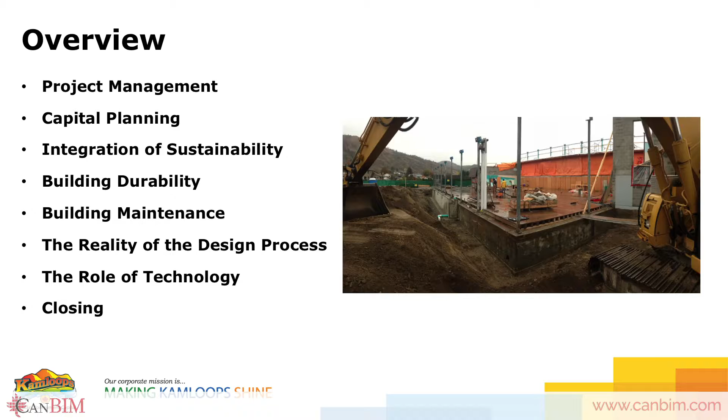So anyway, that's a little bit about me. Give you guys a quick overview of what I'm going to talk about. My focus is more about, instead of technical design stuff, the implementation of these things and how it all comes together and how we look at it and move through these projects. The first note is project management, which is kind of my role at the city, then I'll roll into capital planning and sustainability, which I'm sure you guys hear a lot about, which is great, but what I want to express is how we actually get it done—it's a little more difficult than it sounds getting it rolled into the project.

So anyway, I'll touch on that. I'll talk about building durability as well, building maintenance, and then the reality of the design process, I'm calling it, and then the role of technology.

But you got to recognize the importance of everybody's role, and I make mention of that by saying even the guy that's providing the steel can take the project off the rails as just a supplier. So you've got to regularly be aware of that and make sure you have the people in place to make sure all these things are getting done and you're not getting yourself in trouble.

So keeping in mind, having a coach mentality is kind of how I do it. Instead of just pushing things off, I try to work with the team and monitor the health of the team, and hopefully the architect and the general contractor are open with issues and we can work through them as a team, because that's what we want to do at the end of the day. Everybody has the same goal in mind. You just got to keep that in perspective for everyone.

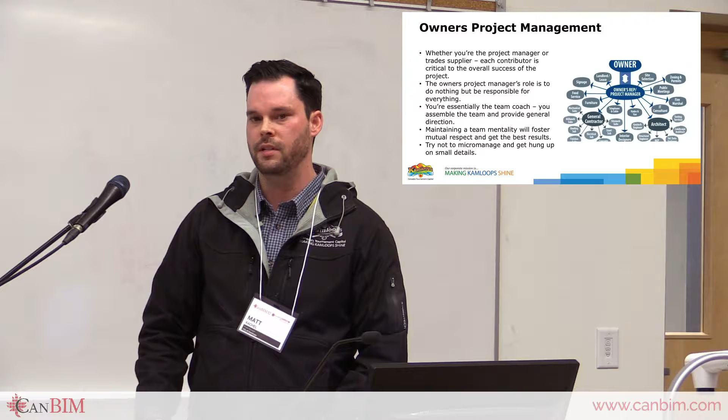Having that team mentality fosters trust and mutual respect, and then you're more open with each other, and it's easier to work through problems as they come about.

Okay, capital planning. So this is the tricky part. A need or a want is identified. The artistic people have ideas, and the technical people build boundaries around them. What I mean by that is usually these great ideas come about, and then an engineer comes and says, oh, you can't do that because of these reasons, you can't do this, you can't do that, and we have to pull it back until we get it in alignment with something that works. Not every design works for every site. You can't put sustainability in every single project. You have to just be conscious of that.

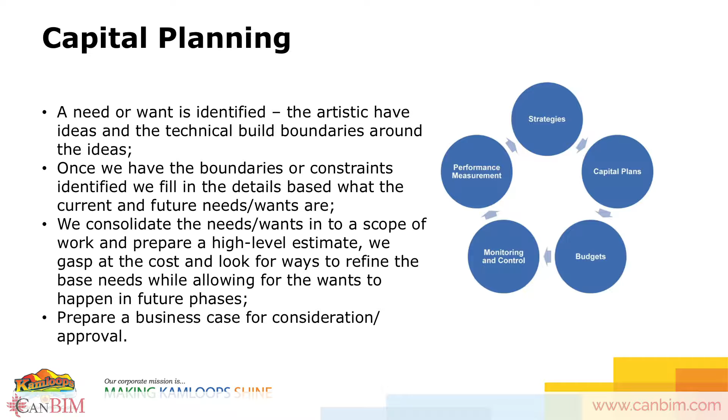So once we have the boundaries or constraints identified, we cycle through what the needs and wants are. The needs are kind of what's going to define the business case - let's use pools for example, because that's what I'm going to lead into. So we have all these tournaments coming, the population of Kamloops is growing, we need another pool. So those are the sort of things that would be a need - we need a pool.

Moving on from there, now the wants start to roll in. Well, it would be nice to have a slide, and it would be nice to have maybe a spray park outside of the pool or something like that. So these are the wants that start to roll in. And then once we have all those on the table, we look at the costs and we gasp, and then we start to figure out how we're going to get that done.

It's important to have all those wants on the table, because we can work towards that in future projects. We may not be able to get it all done right away, but at least if we think about it and plan for it, then it can happen later. So once that's all done, we put together a business case that goes forward to City Council for consideration. I've really tried to cram a lot in here, but there's a lot of complexity and thought that goes into these before they go to council. I know sometimes people from the area, some ideas might seem like they just came out of nowhere, but really there's sometimes years behind thinking about these things and planning them.

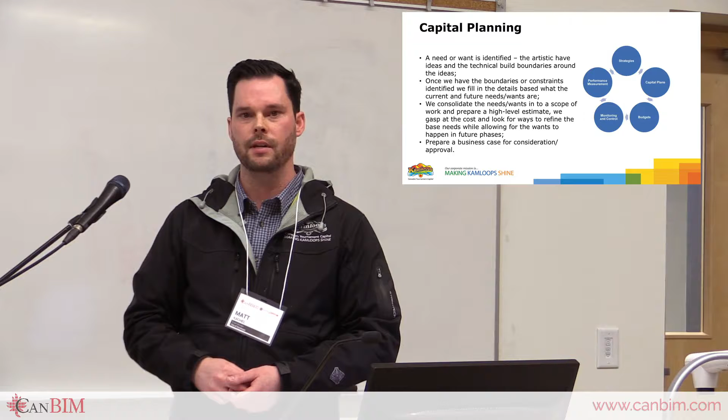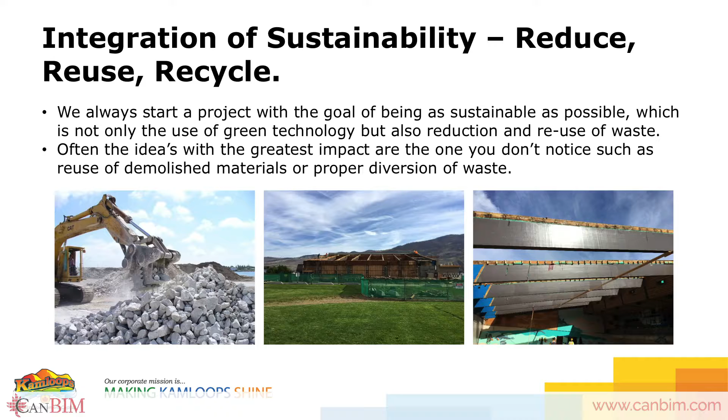Okay, integration of sustainability: reduce, reuse, recycle. I just wanted to shed light on this. We like to think of these sustainability projects about the things we can see and touch and feel - okay, let's do solar panels, let's do this or let's do that. But sometimes you have the biggest impact in a place you don't expect and you can't see.

So I have a few examples here of projects. The first one with the excavator with the crusher there is not actually from a project - that was just an example of concrete crushing, which I'll lead into. The other two photos are of our Westsyde Pool. Some of you may be familiar with this project, we did it over the last few years. For Westsyde Pool, we preserved the pool and basically rebuilt the frame and structure. This created a lot of waste because all the wood material that came off the building - what are we going to do with it? I think that's something that gets kind of lost in the sustainability piece sometimes.

This is a massive amount of wood to get rid of. What do you do with it? You need to look at the demolition and go through these pieces and see where there's value. Those beams maybe aren't good to support a roof anymore, but they can be used for other things, so let's just not throw them away.

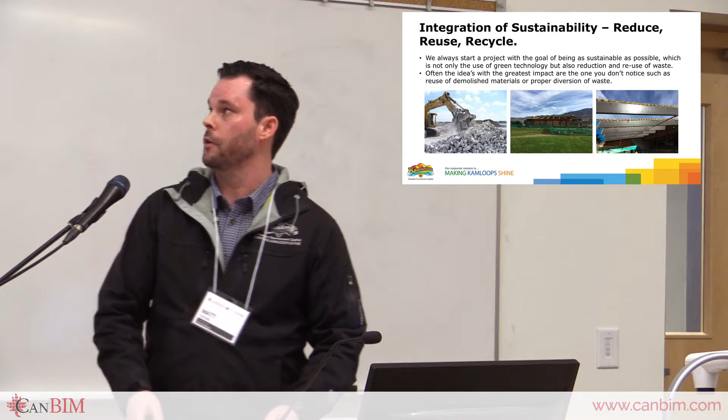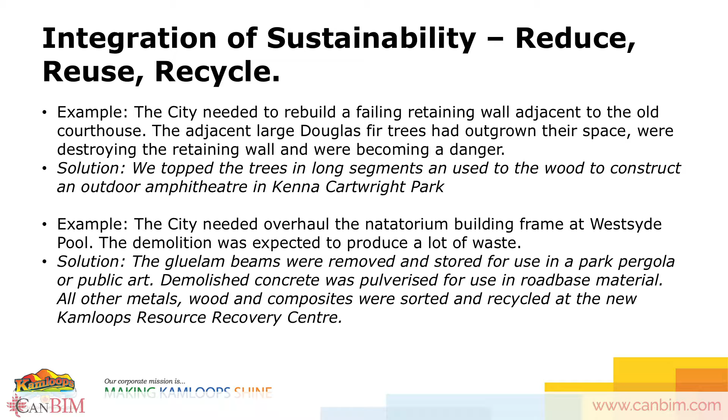I'll lead into a few examples here, starting with concrete crushing and reusing materials. The city rebuilt the retaining wall on the side of the old courthouse a couple years ago. The wall was getting pushed over by massive trees, so we had to remove them. Anytime you remove a tree there's a big issue, but there was a lot of thought put into it.

What do we do with these big, healthy, mature trees? We don't just want to cut them down and send them through the chipper. So we topped the trees into the longest segments the faller could handle, loaded them on a truck, and they were used to build the amphitheater up at Kenna Cartwright Park. They weren't just thrown away.

The other thing we did is take the old concrete, bust it up, and use it on our roads. We make what we call RAP, reclaimed asphalt and concrete material. When we do a road project, we'll mill the road, collect those millings, and use them as road base for other projects because there's still value there. We'll use the grinded concrete and mix it in to reuse it instead of wasting it.

Not all sustainability concepts are good for every project. They need to be clever, have a clear and measurable benefit, and be financially viable. It's easy to get sucked into the really fun stuff like solar panels, but you want to be conscious of what your payoff is.

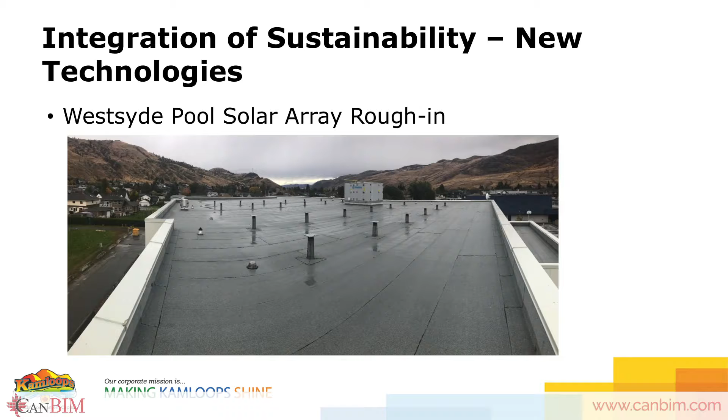This is the roof of Westsyde Pool. You guys saw the deconstructed building—this is the new flat roof and frame, and those steel pieces projecting from the roof are supports for the solar array. We had the building apart and thought, well, we can't buy all the solar panels now, but we can make space for the inverters, integrate the mounts to the structure, and run the conduit to feed the cable through to get them connected.

This actually went forward as a supplemental. If council accepts it, we can essentially mount the PVs, run the cable, and hook it up to the electrical system—it's all been considered as part of the original construction. It's a way of trying to say, okay, we can't be totally sustainable yet, but if we include these things now, it makes it easier for us later, because you can't go put this on after the fact.

The reason those supports have to be so significant is that wind uplift and snow drift can cause a lot of grief to the structure. It's not a matter of just easily bolting down a jack in this situation—there's a lot of wind load through here, so they have to be properly anchored, or the solar panels will go flying away.

We also have to get creative because people like to steal them, so we put tamper-resistant hardware on there to try to slow people down. I think the Sing Bowl a few years ago had solar panels on it, and those were taken—$100,000 worth of solar equipment. Whoever did it knew what they were doing, because they got the inverters, the cable, the panels, everything, and they didn't break any locks.

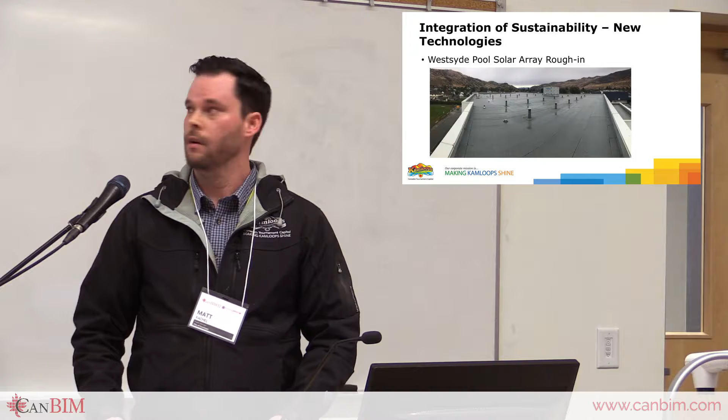So just things to consider when you're doing these projects—solar equipment has a lot of value to it, and people will take it.

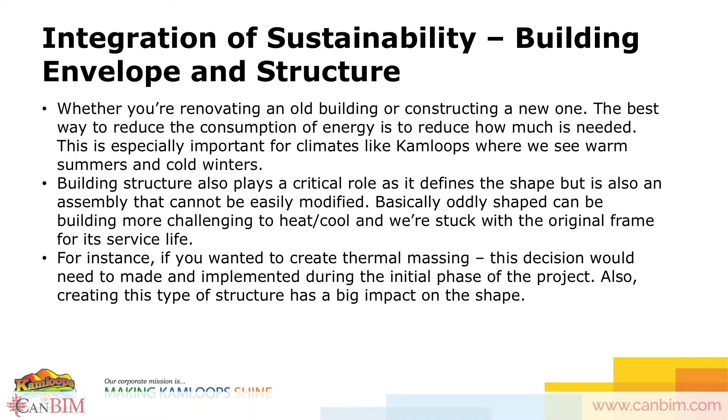Whether you're renovating an old building or constructing a new one, the best way to reduce energy consumption is to reduce how much is needed. This is especially important for climates like Kamloops, where you see extremes—either really warm or really cold. So when you do the envelope and structure, you've got to be careful and think about the climate to get maximum benefit.

Building structure also plays a critical role. If you make the building a really weird shape, it's going to be harder to heat and cool and get air to all the spaces you need. So if you want to do major sustainability things, it's good to think about it at the start, because this will also affect the shape.

I'll use an example of thermal massing, which some of you may be familiar with. It's basically, to put it simply, a big section of concrete that absorbs heat all day and then radiates it back out into the building. That obviously has a lot of effect on structure, so if you want to do that, you need to think about it and roll it into your original plan.

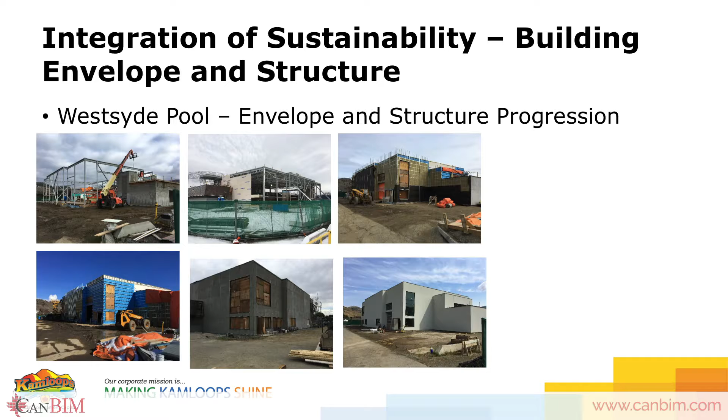Here's an example of the progression of Westsyde Pool to show you guys. You can see the frame, the insulation and stucco layers starting to go on the blue skin, and then the finished stucco product. So there's a lot of different layers there.

On top of the climate of Kamloops, you also have to think about the use of the building. With a pool, you're maintaining this constant balmy environment, so you have to be really careful about where the condensation points are and control the water. Ideally, you want it to leak to the inside of the building—if you can see the wall sweating, you've done your job. The problem is when it gets stuck in the wall and you get rot. I'll show you an example of that coming up.

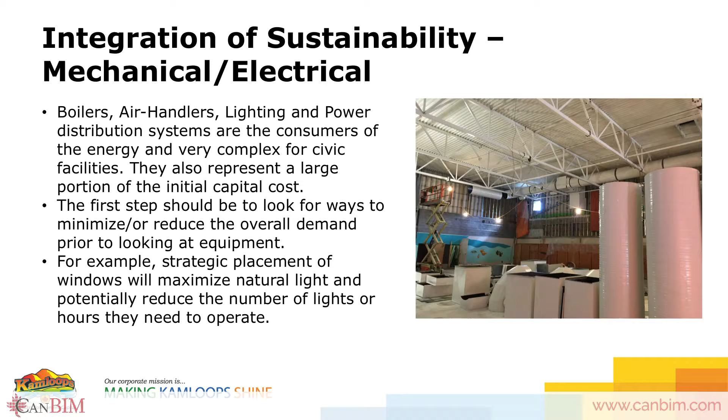The other thing—and I think this is where everybody gets stuck—is the mechanical system. Yeah, you can put in new boilers, air handlers, special lights and stuff like that, but if you take the right mindset from the start and try to reduce the number of parts you need, that sometimes provides a greater benefit. For example, strategically placing windows so maybe you don't need a light all of a sudden. Thinking about that as you go through is critical.

One example for Westsyde Pool: one of the top pieces of advice we got from the mechanical designer was to put a cover on the pool at night. Seems very simple—we don't have a cover. When the pool's sitting there not used, all that heat's just leaching off the pool and getting up into the superstructure. If we could cap it off, the boilers wouldn't have to work as hard to maintain a temperature nobody needs at 2 in the morning. Just a simple little thing, not the really exciting part—just adding a pool cover—but little things like that can make a very big difference.

Whereas if we're investing in a boiler—I know what they cost for Westsyde Pool, they were $120,000. That pool cover was $15,000. So it's a lot cheaper, and you get comparable benefits from it.

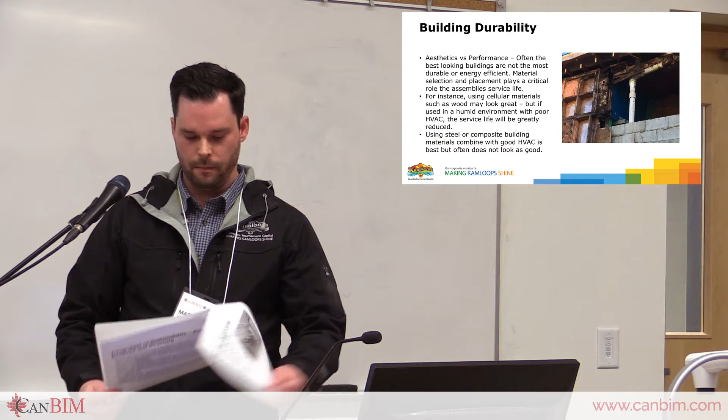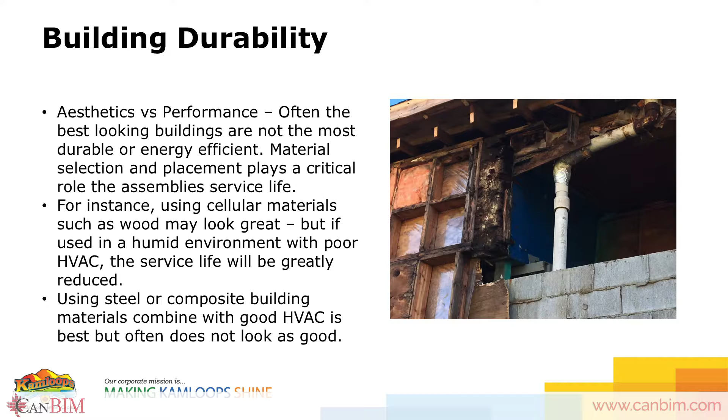Okay, building durability. This is one of the main glulams on the end of Westsyde Pool. For those who don't know what happened here, there was a building envelope failure over years and years of condensation. This is an example of what I was talking about—not controlling the dew point.

When moisture ends up where you don't want it, especially on cellular materials like wood, you end up with rot, and a lot of times it's hard to find because it's concealed. In the example of Westsyde Pool, this was not apparent for a long period of time because it was concealed in the walls. The structure that could be seen was fine—there were multiple inspections done, and there was no reason for concern.

And then a few things came up that led us to believe there was another issue. The problem here was actually an air leak, not a water leak. People were thinking when you see a leak in the pool, you automatically think it's an exterior leak, but it was an internal leak, an air leak that created a lot of condensation, and that's how we ended up with that.

But the beams were, at the ends especially, quite damaged because that's where the air got concentrated. Building shape also played a role in that. It had a slanted roof, so everything got trapped in one corner. If you look at the rate of the damage around the building, you can see how the shape played a role in the damage to the envelope.

So when we're taking these things forward at the city, we try to make sure that the materials we're picking work with the use of the building. So we have a pool, for instance. We shouldn't be building with wood. We should be using steel or composite materials. I'm not saying you can't use wood, but...

I'm just curious, have you guys looked into smart sensors or anything for these, to monitor it? For this example it was obviously too far gone already, but putting it into the new building makes sense to monitor moisture points, so if we're getting a lot of water condensation, what's going on, you can kind of target your repair a little bit. We haven't actually done it here yet, I did it when I was a consultant, but we haven't brought it forward to buildings yet. It's a good idea though, for sure.

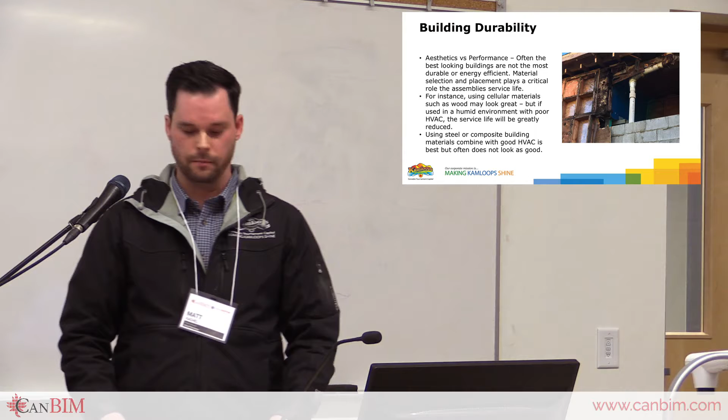Oops. Am I missing a slide? No, okay, then we're good.

Okay, so this is where I'm going to tie it into the BIM stuff. So the reality of the design process: owners like to change their minds. I can tell you that as a representative right now - it's not necessarily me doing it as the owner's project manager, but the people I'm working with will, and they don't understand all these drawings all that well.

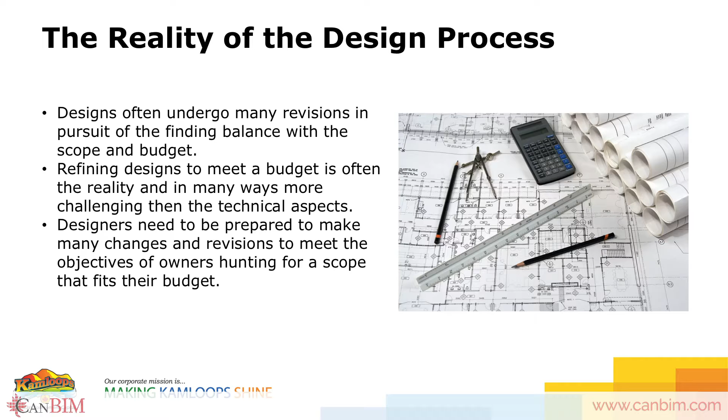Probably the hardest part I found in my career was not the technical aspects of it, it was trying to make sure that it met a budget. So the owner would say, I want $300,000 with a building. That's kind of the hardest challenge I've ever faced. You can always find someone who can design a beam to support a certain span, but can you do it for a certain budget? That's the really big challenge and struggle we have, trying to meet that budget.

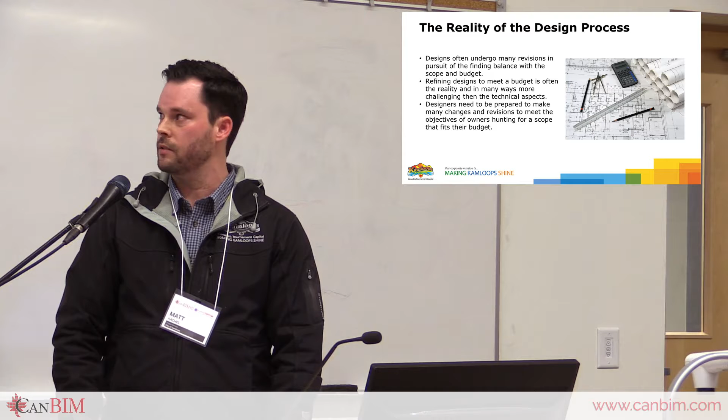Especially with the city, we're under a lot of scrutiny with budgets, so we have to make sure that when we take forward a number, it's not going to change.

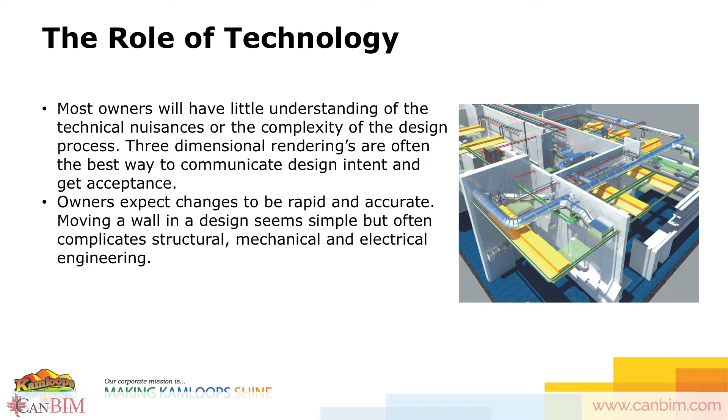The role of technology leads into a bit of what I was saying before - when owners like to change things, and some owners don't understand how this all works. So we may say, I like what you did, but I don't like that wall there, I actually want to change this space, now I'm going to put a daycare in there. In the past a lot of designers would roll their eyes, thinking now I've got to redo everything. I used a slide here as an example, but you see the impacts that moving a wall would have - the mechanical bulkheads have to move over, the electrical systems have to move. It affects so many things.

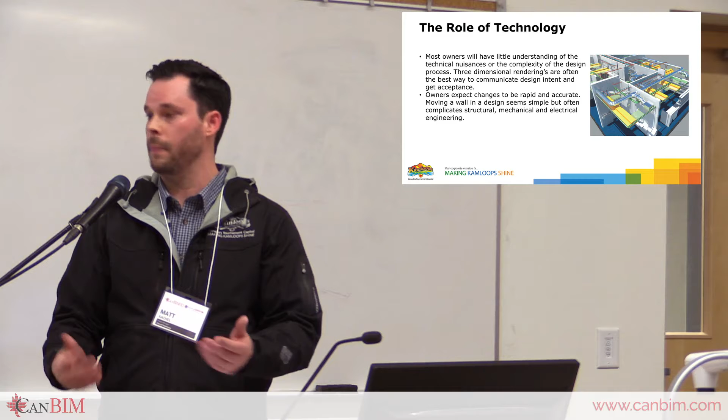So being able to deal with this in an easier way with what the software is doing now is awesome, because with owners it'll be, okay, we want this moved for the daycare, and then it has to be done - I need it next week. So the time expectations are a huge crunch as well.

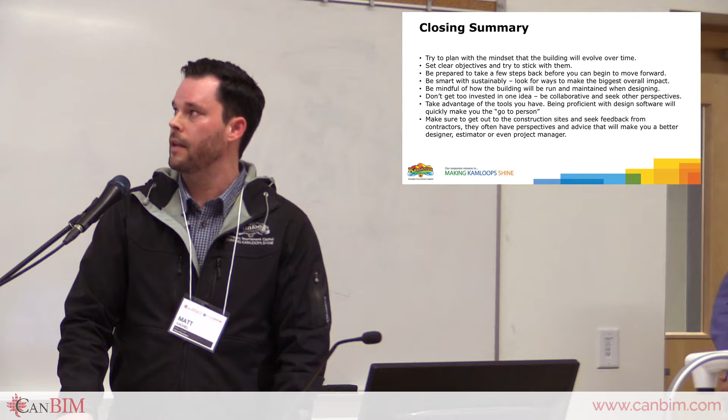Anyway, so that's kind of my presentation. In closing, I'd like to leave you guys with a few notes. Try to plan ahead with the mindset that the building will evolve over time - like the example with Westsyde Pool and the solar panels, try to think about what it might be in the future and allow that to happen. Set clear objectives and try to stick with them.

That leads to my point about needs versus wants - what are they? If you have core objectives, try to hold on to them and keep them in mind when you're moving forward with the project. Be prepared to take a few steps back before you can take steps forward.

So again, talking about the design process, you may in your mind design the perfect structure and everything's great, and the owner doesn't like it. Now you've got to go back and start modifying it until you get it right.

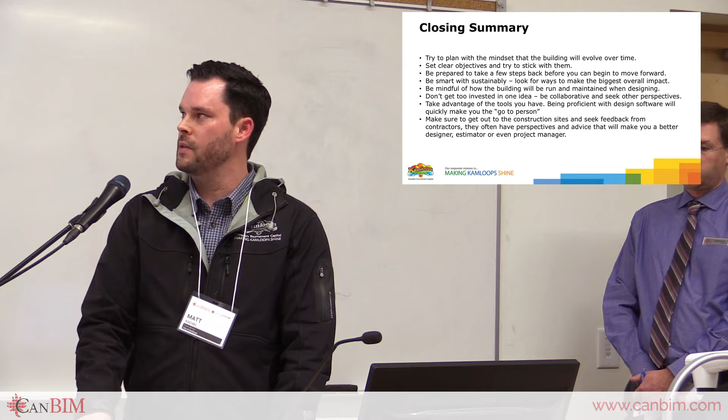Be smart with sustainability. Look for ways to make the biggest overall impact, not what everybody's going to think is cool. Try to get that in there, but sustainability needs to be a mindset that runs through the entire life of the project. That's why I wanted to show you guys the demolition, because I think that's something that gets forgotten about and has a big impact.

Be mindful of how the building will be run and maintained. Probably some of the best advice I got being the city's project manager is from our operations people telling us, hey, this valve doesn't work here, this doesn't work. Knowing that going in, you've got to remember at the end of the day it's for them to operate, and if we're making it hard for them, it's not going to be a success.

So don't get too invested in one idea. Be collaborative and seek others' perspectives. Don't get fixated on something. Try to be inclusive and think about other things. A lot of people will bring stuff to the table that you never even thought of, and I've changed my mind a lot by asking that question. So just keep that in mind.

Take advantage of the tools you have. Be proficient with the software, and it'll make you kind of the go-to person. When I was designing, I was that person. I got really good with the software I was using, and I was able to be the go-to person and evolve from there, working my way out of design and into project management.

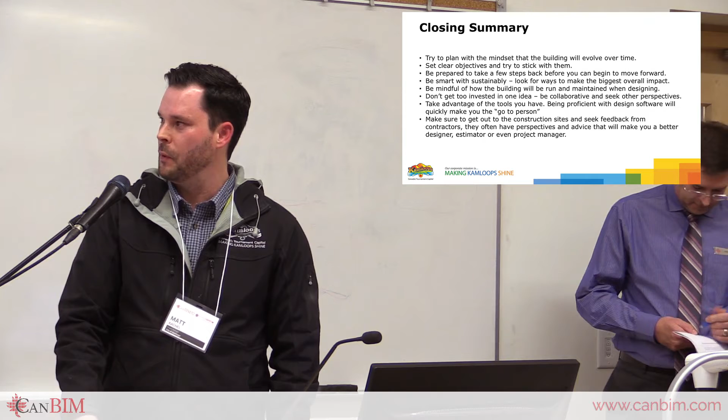This is kind of my most important point: go to the sites and seek feedback from the contractors. I know there's a few contractors here. They have important information to share with you guys. If you don't go to site and you don't see how things are built, then you're not going to be as good of a designer. When you think about how the project and pieces of the project might go together, you'll make everybody's life a lot easier. So going to site, talking to contractors, asking for their perspectives and opinions on things - you don't always have to see eye to eye, but at least if you seek their input, you may find it's quite beneficial to you as a designer or even a project manager.

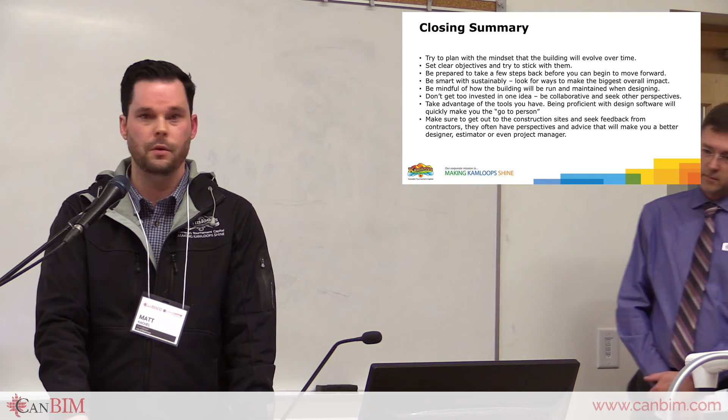I've got great advice even on that from contractors. So anyways, anyone have any questions?

Good, you touched on it a little bit, but life cycle analysis - do you, or does Kamloops, have any thoughts on writing a spec for, say, facilities management models?

Operations maintenance, yeah, we're kind of getting there. I think some of the buildings planning stuff is a little behind, so we're starting to get in front of a bit of that and plan these life cycle costs a little more. One example is our roofs - we have a lot of roofs that need to happen, and instead of just being reactive and saying, oh, we have a roof that's damaged, we need $500,000 to fix this roof, that's been recognized by both finance and the buildings team as not a good way to do it. So we're trying to evaluate these way ahead of time and have a rolling budget built in to deal with those. We haven't looked at specific software or techniques or methodologies to get too deep into that - we're just kind of getting started.

So operations maintenance - a building, 80% of a building's cost through life cycle analysis is post-construction. That's a huge amount. This is where kind of the real holy grail of BIM is, as we say - life cycle data. I know in Alberta, where I'm from, the government has put a big initiative forward. It's just something that I think is overlooked a lot. I agree, I was just curious as to where